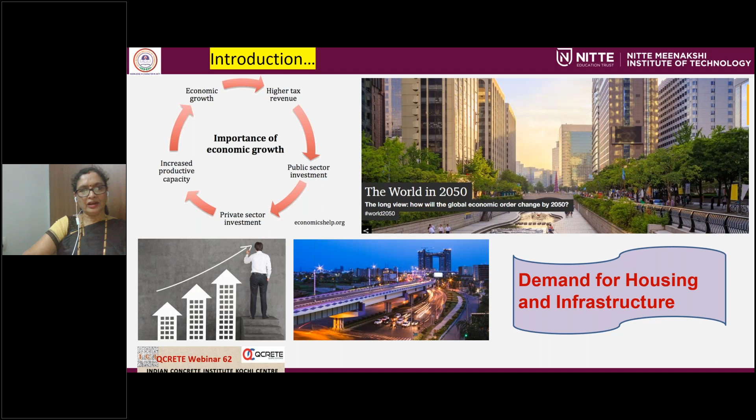Typical examples I can quote here are, one from United Arab Emirates: the 11 billion Etihad rail project and 2.7 billion Sheikh Zayed double-deck road project, which is going to start this year and completed by 2026. Then in India, 100 critical transport infrastructure projects with investment of rupees 75,000 crores, and a capital investment of 10 lakh crores. And if you take Australia, the gas industry road upgrades in Northern Territory, Australia, will be upgrading roads for supporting the development of gas resources around Beetaloo sub-basin.

So the Australian government has sanctioned $173.6 million for this particular project. These are all typical examples, and construction material market is at its highest, material consumption is at its peak, whether concrete or steel, and the projected growth in consumption is around 1,729.62 billion by 2030.

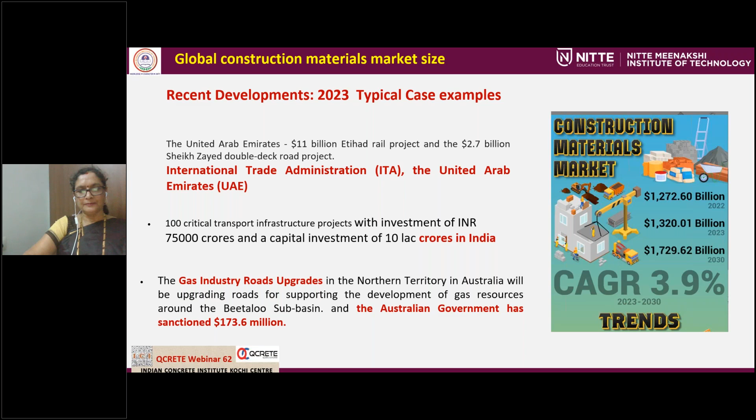Because of the huge demand for housing and infrastructure, construction industry is one of the largest consumers of materials and natural resources, and is a major contributor to the growth of any nation. It is also responsible for maintaining the harmony of nature, which is the basis for sustainability.

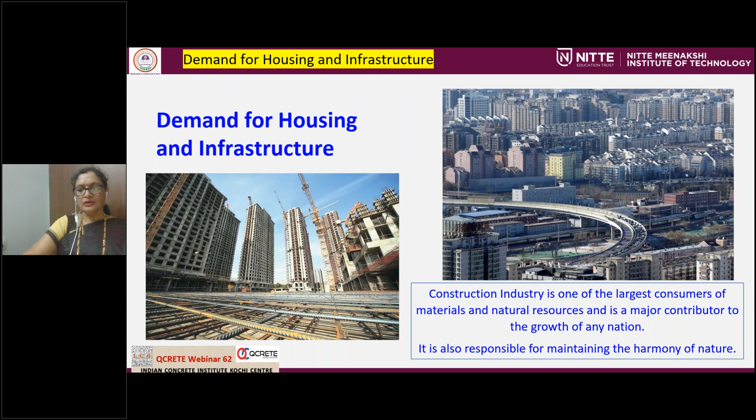If we look at the consumption of material, the construction sector is the second largest sector with regard to material consumption, accounting for around 20% of the material demand. Further, construction is also the fastest growing sector with regard to increases in absolute material consumption. Material consumption grew by more than 1 billion tons during 2007 itself. If such growth rates continue, the construction sector will surpass the agriculture sector and become the sector with highest material consumption.

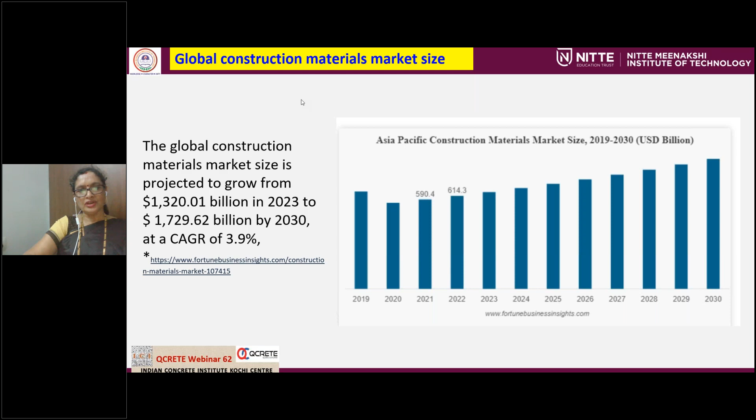So for global construction material market size, I took an example of Asia Pacific construction material market size. In this survey, the global construction market size is projected to grow from $1,320 billion in 2023 to $1,729.62 billion in 2030, at a CAGR of 3.9%.

So growing food, building structures, or moving goods from place to place are all energy intensive industries. Energy makes up a significant part of operating cost for business in all these areas, and it is a basis for assessing sustainability also.

Making a comprehensive assessment of a country's resource requirement is a challenging task. There's a method named material flow accounting, which was developed to assess the overall scale of resource extraction and use. The terms industrial metabolism or societal metabolism have been used to illustrate material flows and the scale of impact on the environment, indicated by the size of metabolic throughput—that means the amount of material appropriated from the environment and returned back to it in the altered form.

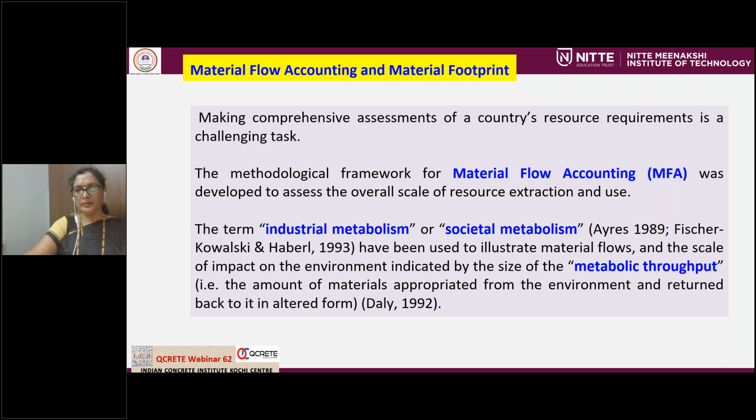This is the most important sentence: metabolic throughput is the amount of material appropriated from the environment and returned back to it in the altered form.

So while assessing material flow accounting, few materials are selected under each area or industry. In the construction industry, the critical materials identified in material flow accounting and their criticality was assessed on the basis of several attributes: scarcity of the resource, both physical and economic; cost of material and transit and carriage, that is transportation cost; environmental impact due to extraction and production; embodied energy, that is energy consumed from the moment of extraction through production and transportation; supply risk, which includes potential political, physical, cultural, legal factors; and finally, reuse and recyclability potential of the material for secondary uses. Based on these 6 criteria, materials are selected and assessed.

Now for the civil engineering or construction industry, the five materials identified are sand, soil, stone, limestone, and iron and steel.

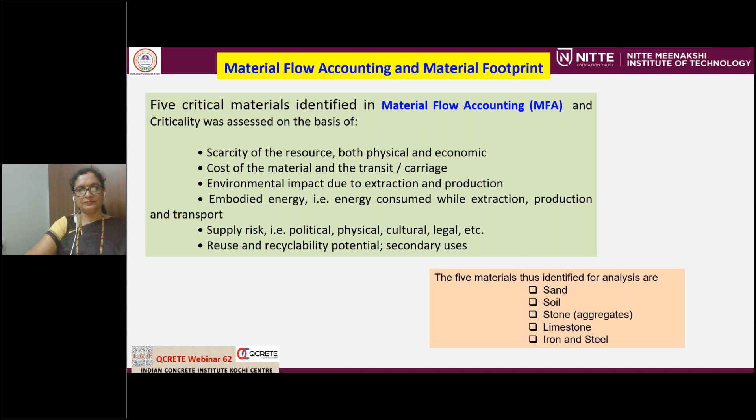So we depend on the earth. We are fully dependent on the earth, trying to extract material and also to exploit natural resources. So what is exploitation? Exploitation of natural resources is dependency on the natural and finite resources for economic growth of any nation without balancing the resources and waste.

So earth is one of the 5 elements of nature, from where we draw materials or resources for everything in construction. Earth is one of the 5 elements of nature called Panchabhuta in Sanskrit: Jal or water, Akash or ether, Agni or fire, Bhumi or earth, and Vayu or air. These are the 5 main elements of nature. We forget that we extract resources from it.

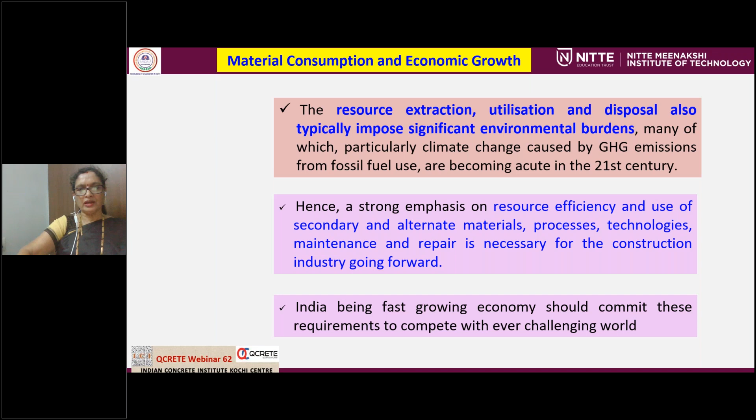India, being a fast growing economy, should commit to these requirements to compete with the ever changing challenges of the world.

So therefore, we need to manage growth and development without compromising the requirement of sustainability. That is, the judicious use of resources is essential in every society's interest through a combination of conservation and efficiency measures for economic, social, and environmental sustainability.

So the buzzword worldwide is sustainability and sustainable practices. The construction industry should become more responsible in its practices of creating structures using processes that are environmentally responsible, resource efficient, throughout a building's life cycle, from siting to design, selection of materials, construction, operation, maintenance, renovation, and deconstruction. Hence, to make a green infrastructure, the practices expand and complement the classical building design concepts of economy, utility, durability, comfort, and is known as sustainable high performance infrastructure.

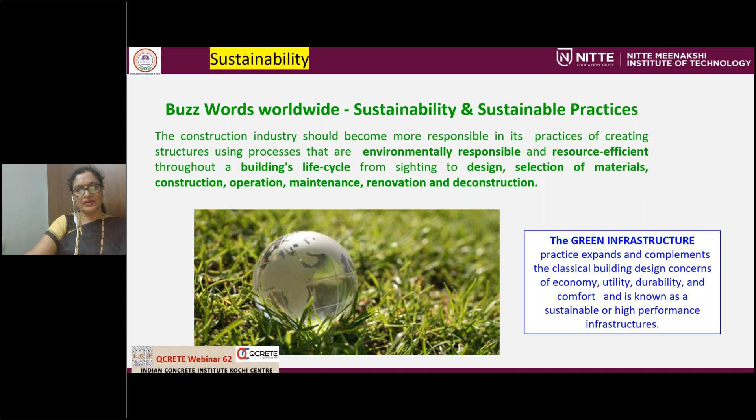Sustainability is not new for Indians. Sustainability has always been a core component of Indian culture. Its philosophy and values have underscored a sustainable way of life.

In ancient India, environment was given importance. It is interesting to see ancient Vedas with several references regarding ecological balance and environmental protection. All four major Vedas - Rig Veda, Yajurveda, Samaveda, and Atharva Veda - recognize the importance of maintaining season cycles. They also highlight how this getting altered results in climate change owing to inappropriate human actions.

India is a diverse country with a variety of ethnicities and religions. For most Indians, faith is an essential trait. The Indians are great supporters and promoters of environmentalism. Indians regard everything about them as pervaded by divine presence. Be it rivers, mountains, lakes, animals, flora and fauna, are all manifestations of God.

So they worship the Panchabhutas, the five gods of nature. Thus, there's a deep respect and gratitude felt towards nature.

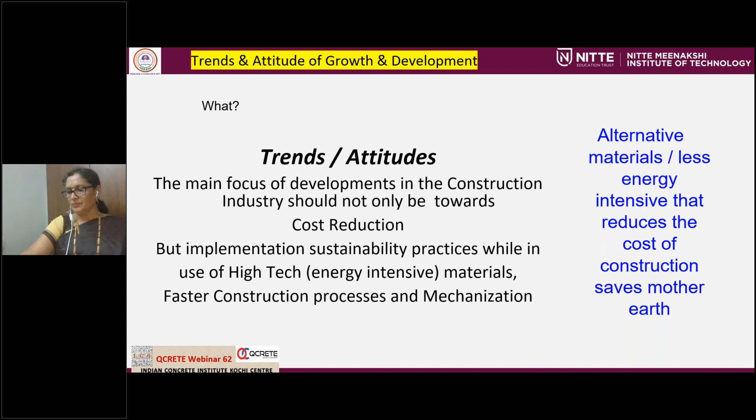So sustainability can be considered under four different aspects: built environment, consumption of material, environmental aspects, and ultimate effects. The built environment covers all aspects of our lives, encompassing the buildings we live in, the distribution system that provides us water and electricity, the roads and bridges and transport system which helps us connecting from place to place, commuting facility.

So through this, the built environment - while considering it from the stage of conception to completion - at every stage, sustainability should be looked into, whether it is surveying, design, construction, operation, maintenance, renovation or deconstruction. At all stages, one has to look at the energy of each material and process.

So use of less energy intensive materials, processes, technology and maintenance is one of the key factors for adopting sustainability. Use of alternative materials in construction also.

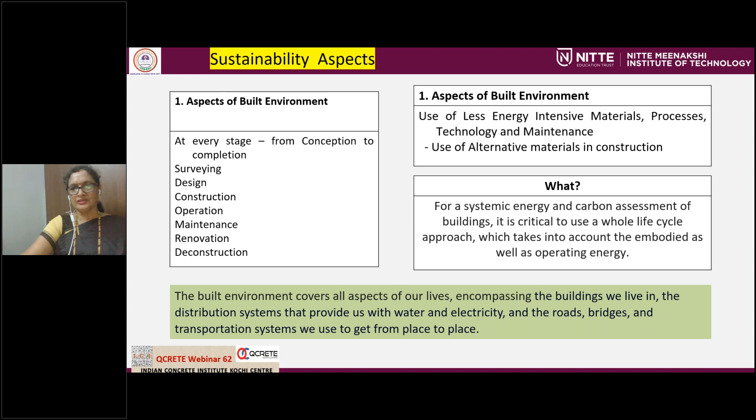So then what is embodied energy? Embodied energy is the energy required from the moment of extraction of material, through the process, and then finally producing a product and transporting it. So in construction, that means the sum total of all energy incorporated or invested throughout various stages of manufacture from raw materials to finished product.

Now in construction, there are various stages at which energy is involved. Initially, embodied energy - energy consumed in creating the structure, which indirectly says it is from conception to completion. Then from a material perspective, from extraction, processing, manufacture, transportation and assembly.

The second one is recurring embodied energy, that is the energy required for day-to-day maintenance. Then operational energy, which may be active or passive. Passive energy system is energy drawn from natural resources, renewable energy. Active energy system is energy from HVAC, mechanical, electrical, chemical processes and other requirements.

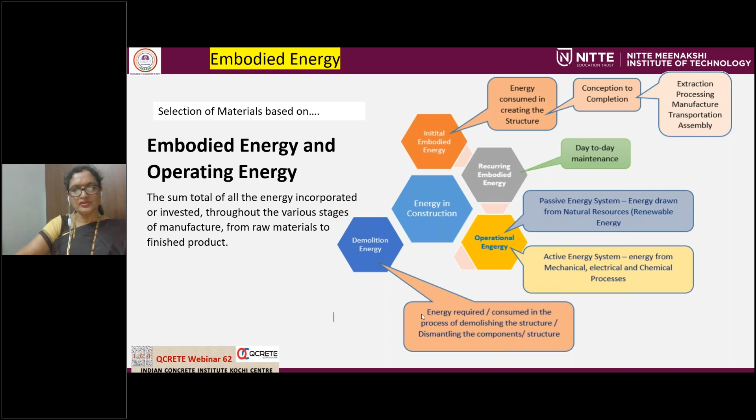So each material has an embodied energy, measured in terms of megajoules per kg. There are a few materials I have listed here as a sample.

While selecting the materials, there are many points to be considered. One of the points is embodied energy. Sometimes we may select a material which has low embodied energy, however, if it needs high operational and maintenance energy, then it may not be worth selecting that material.

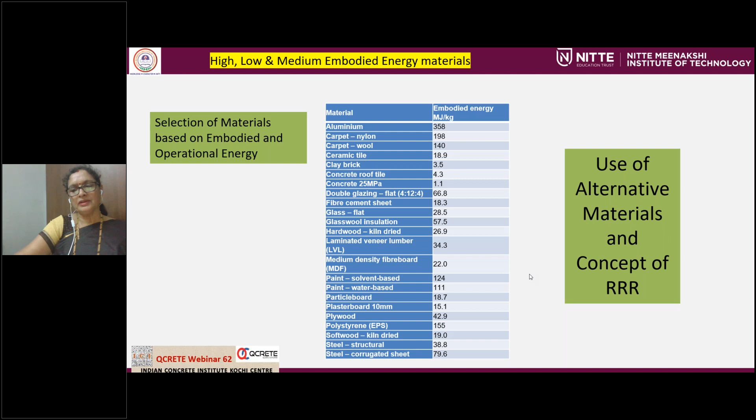So if you look here, structural steel is 38.8 megajoules per kg, corrugated steel 79.6. Of course, this energy assessment depends on place to place - small variations will be there with reference to that.

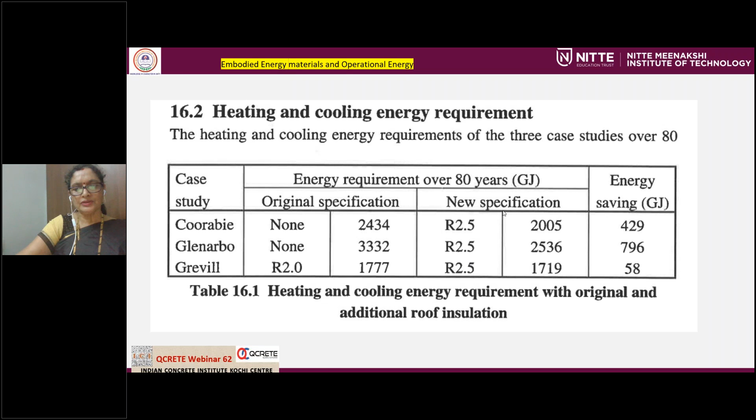So if we look at the embodied energy with reference to operating energy, we can see there is almost 2.5 times increase in the operational energy. This embodied energy of building materials was studied by Stephen Pullen. He considered 10 houses in Australia and studied embodied energy as well as operation energy. The relationship between embodied energy and heating cooling energy requirement was estimated from these typical 10 case studies. You can see the different structures from different locations he considered.

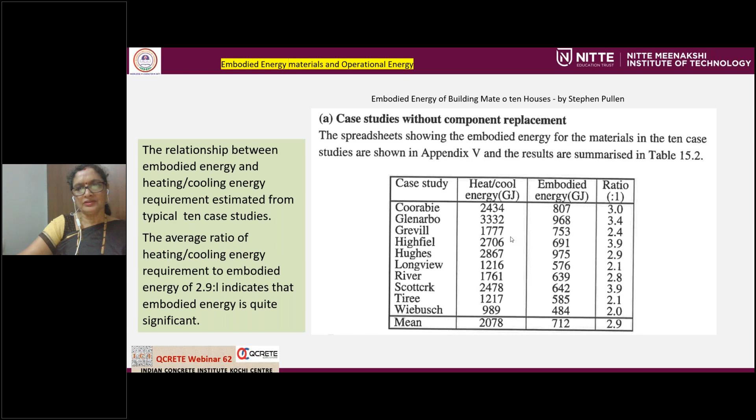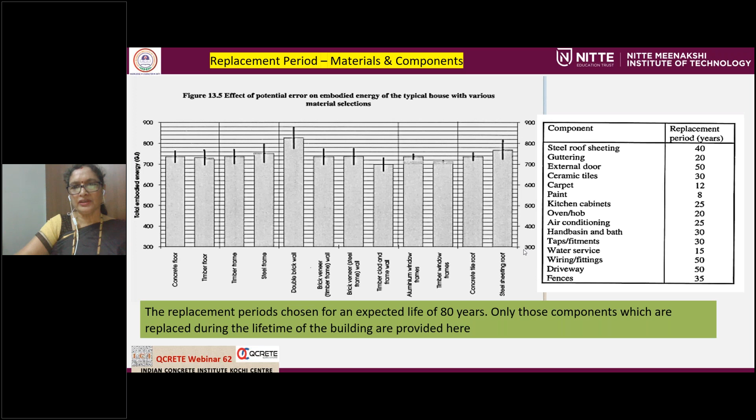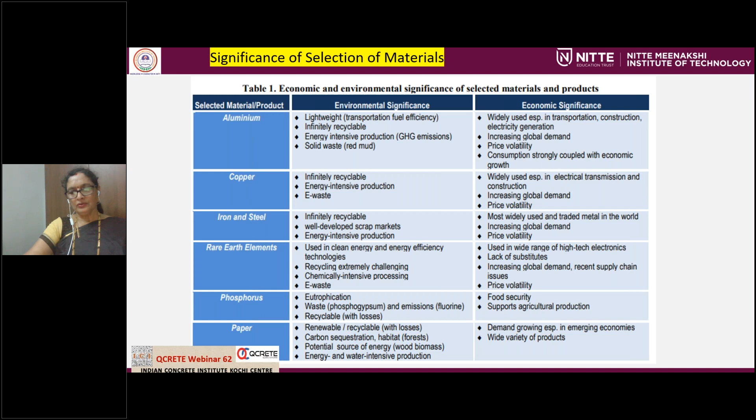So I have quoted a few: copper, iron and steel, rare earth elements, phosphorus and paper. For all these materials, one of the points is reuse and recycling - waste management. Waste management is a known factor for all of us about sustainability. However, we are trying to incorporate waste as a resource, not just in concrete, but in other materials also. In addition to waste as a resource, there are other opportunities created through the use of waste materials - that is the concept of reduce, reuse, and recycle.

The Recycling Economic Information, REI, reported by the Environmental Protection Agency, EPA US, includes updated information about the number of jobs created from recycling, the wages created, and tax revenue to the government. The report shows that recycling and reuse of materials creates jobs while also generating local and state tax revenues. One example cited - this is old data but still worth knowing - is that in the United States it accounted for 681,000 jobs.

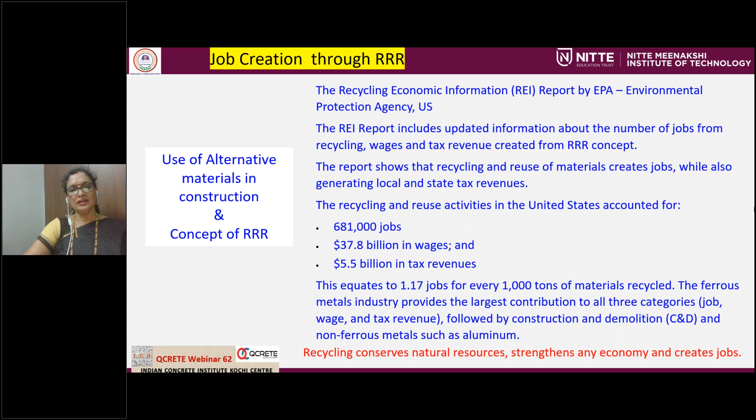This equates to nearly 1.17 jobs for every 1,000 tons of material recycled. In addition to reducing the burden of waste disposal, it also creates jobs, wages, and tax revenue for the government. In this waste material recycling, the ferrous metal industry provides the largest contribution to all three categories - jobs, wages, and tax revenue - followed by C&D waste, and thirdly non-ferrous metals such as aluminum.

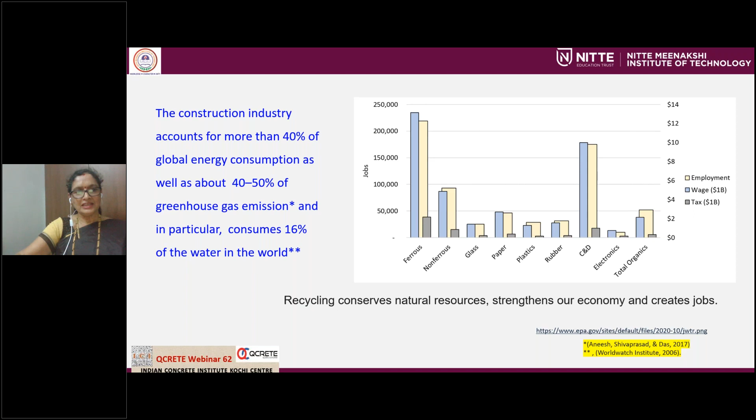So recycling conserves natural resources, strengthens our economy, and creates jobs, right? The construction industry accounts for more than 40% of global energy consumption, as well as about 40 to 50% of greenhouse gas emissions, and in particular it consumes 16% of water in the world - consumption of resources in terms of energy, water, material, and natural resources.

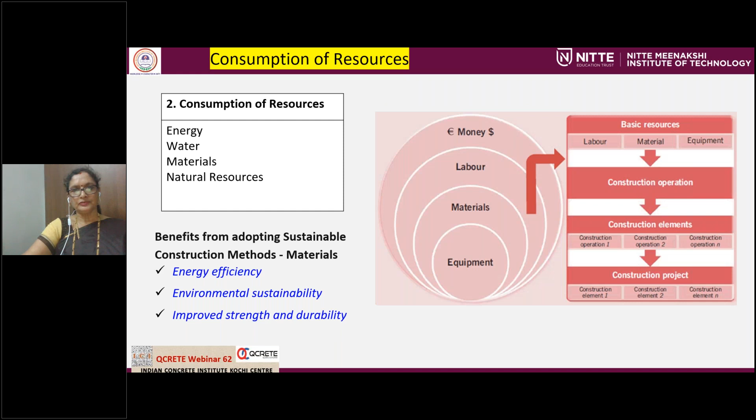The benefit from adopting sustainable construction methods and materials: it improves energy efficiency, contributes to environmental sustainability, and improves strength and durability. In addition, there are known benefits for health and environment - improved health due to safer materials, increased productivity, better surroundings, and more effective noise protection are a few advantages. Green buildings can improve the quality of life. Overall, the green building concept will improve the quality of life.

One can significantly reduce the carbon footprint by using renewable materials, reducing waste, and minimizing energy usage during construction. There are emotional benefits also - improvement in pride and improved living and workspace.

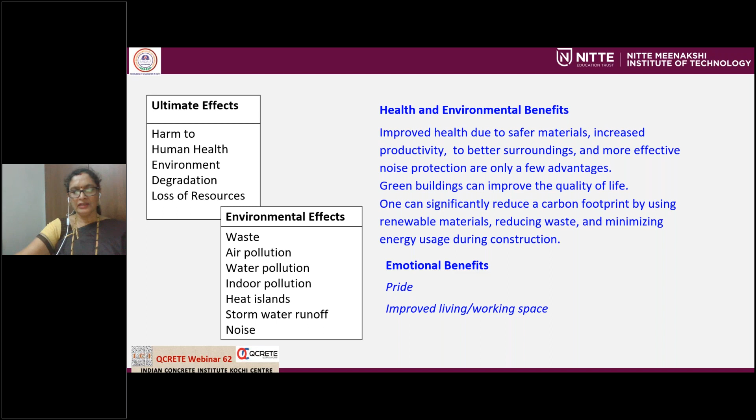Yeah, the latest trend or concept that is moving around in the industry is about carbon dioxide emission. Carbon dioxide emission focus is on reducing carbon dioxide emission in all the projects. It ensures carbon...

Carbon is consistently and transparently quantified at all key points for a project. It is to achieve lower carbon solutions. Users are required to develop their expertise with carbon management, during construction and during maintenance also. Then net zero targets for every project, net zero carbon transition, reduce whole life carbon emission as well as whole life capital and operational cost.

And an increased emphasis on whole life carbon in line with 1.5 degree global warming and circular economy principles. A report in 2021 from Oxfam found that by 2030, the global average emission needs to sit at just 2.3 tons of carbon dioxide per year to keep global warming below 1.5 degree centigrade.

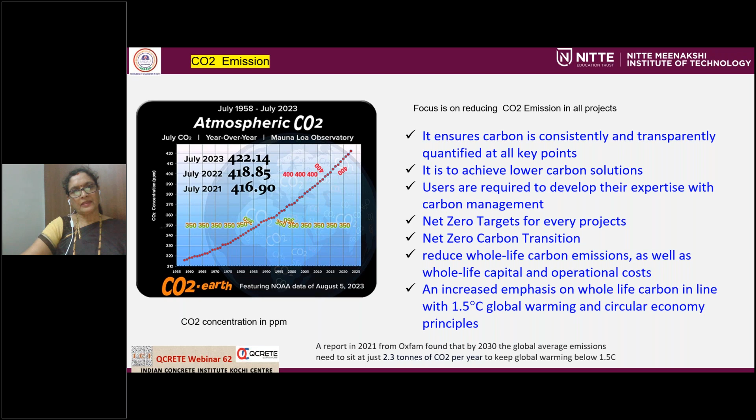So there is one more index called Greendex Index. This Greendex Index is compiled annually by National Geographic and Globescan. It measures the way consumer patterns are responding to environmental concern. The collected information is then gathered into a comprehensive ranking system.

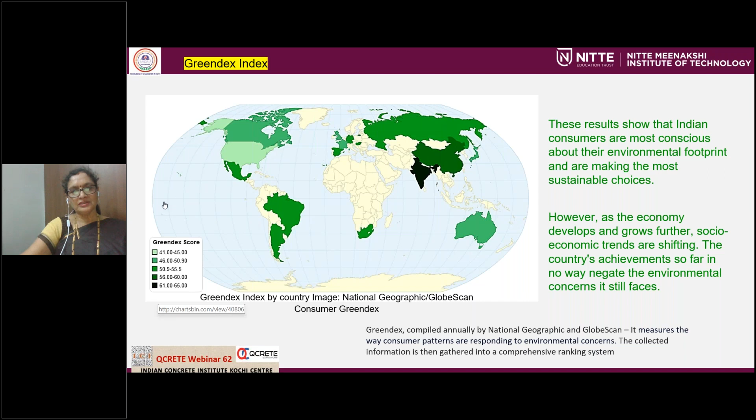If you look at the map here, India comes under 61 to 65% Greendex score. That indicates these results show that Indian consumers are most conscious about their environmental footprint and are making the most sustainable choices. I don't know what factors are assessed because of the actual trend and the point mentioned here. However, as the economy develops and grows further, socio-economic trends are shifting.

The country's achievement so far in no way negates the environmental concerns it still faces. So sustainable construction practices aim at net zero buildings and infrastructure, energy conservation codes of practice, some comprehensive plans to achieve sustainability that call for transit-oriented development, compact development patterns, and environmental stewardship strategies to reduce environmental impacts at various stages of construction, material selection, technology, practices, operation and maintenance. It also insists on minimizing sprawl and conservation of natural resources.

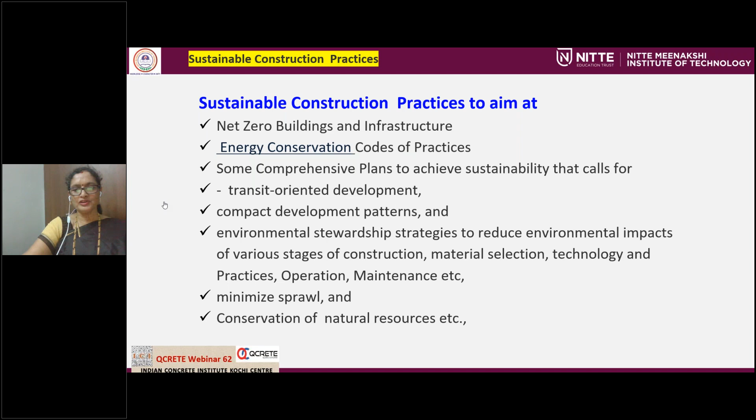There are many codes for practicing sustainability, for adopting sustainability across the world. I have listed a few here: Carbon Management in Building and Infrastructure, PAS 2080-2023, which is practical actions and examples; Institution of Civil Engineers, Construction Leadership Council code; retrofitting dwellings for improved energy efficiency specifications and guidelines; environmental management system requirements with guidance for use, BSEN ISO 14001:2015, and other codes I have listed here.

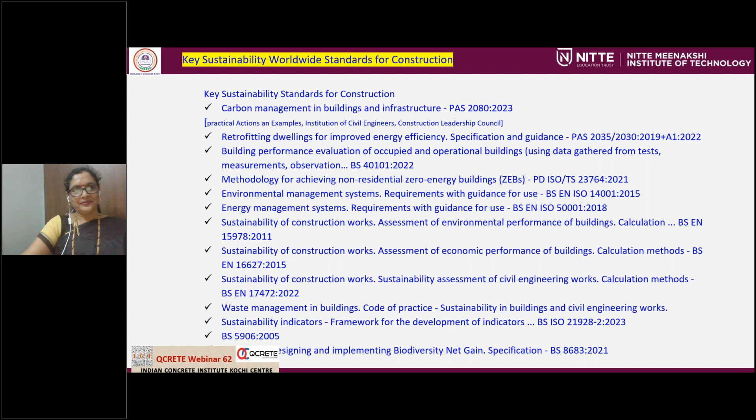Now, while in my presentation, the regular mention of sustainability in terms of alternate materials, then use of reuse, recycle - the 3R concept: reduce, reuse and recycle, waste management - those points I have avoided because all the participants are very familiar with those concepts.

So how do we assess sustainability? What are the policies and regulations? The zoning codes to design buildings with green materials or energy efficient features are available. They are building codes from US Green Building Council, Leadership in Energy and Environmental Design, that is LEED rating system, then USGBC LEED rating system, and International Energy Conservation Code IECC, International Green Construction Code IGCC, then Indian Green Building Council IGBC, GRIHA - Green Rating for Integrated Habitat Assessment, and National Building Code 2016.

In LEED there are different levels of certification for green buildings, which I think almost all of us are aware of, based on different criteria, and total credits and points are earned. The various criteria considered are sustainable sites - this includes design aspects, construction aspects, operation, maintenance, renovation, and deconstruction aspects, in addition to durability, then water efficiency, energy efficiency, atmosphere, material and resources, indoor environmental quality, and innovation and design processes.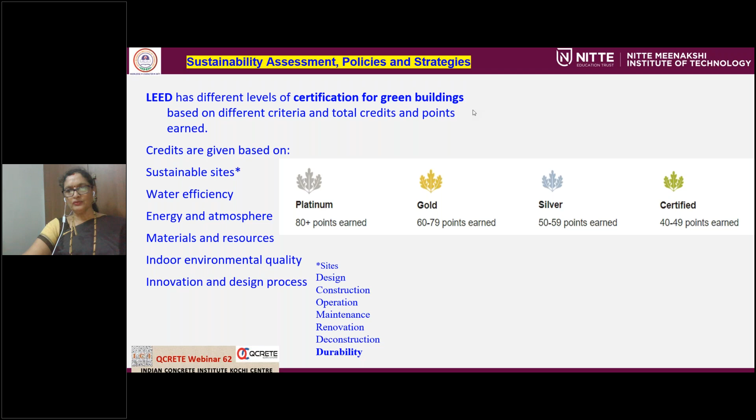So based on the material score, the LEED certification may be platinum, gold, silver, and certified. 80 and above is platinum, 60 to 79 gold, 50 to 59 silver, and 40 to 49 points earned is just certified, LEED certified building.

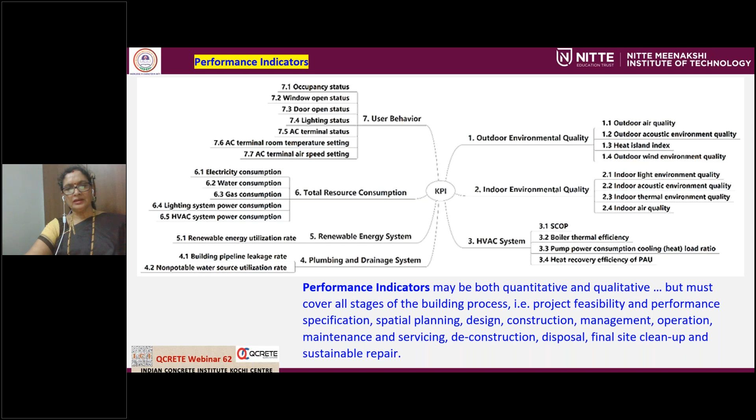So, worldwide sustainability promotion. The sustainable development goals are a universal call to action to end poverty, protect the planet, and improve the lives and prospects of everyone everywhere. There are 17 goals which are very common, known to all of us.

The following principles are required to be adopted across business practices and in advocacy with stakeholders, as well as media, commercial partners and sponsors: sustainability policies and practices, implementing and advocating for SDGs, a human rights-based approach including addressing issues of discrimination and avoiding discriminatory practices, equality and equity including gender, and climate action.

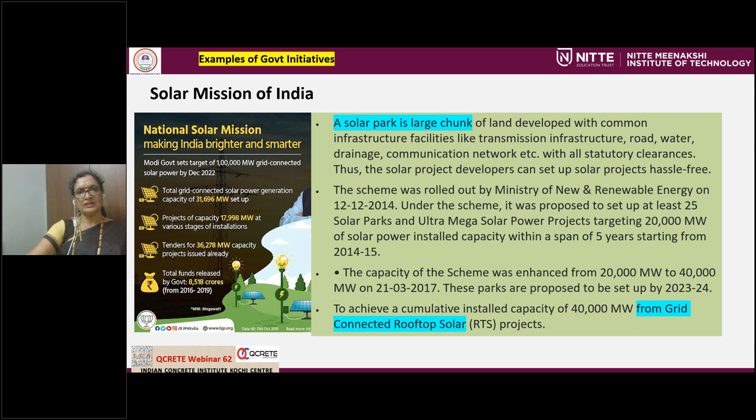So what is the need of the hour? Commitment for implementation of sustainability. We talk so much about sustainability. However, it is mainly now we have to focus on implementation at every stage.

During 1991, when a new economic policy was introduced, these policies liberalized the market and introduced India to the globalized world. There is no doubt that 1991 reforms lifted many millions out of poverty thanks to the rapid growth. However, the general trend of economic profits meant environmental degradation. That is the cause of concern.

However, when the reforms were not purely driven by economic consideration without ignoring environmental criteria, earth is saved and sustainability becomes part of economic growth. That is what is need of the hour.

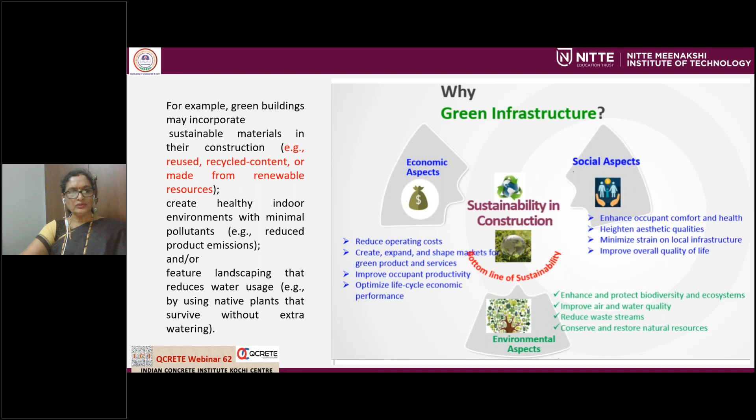So green buildings may incorporate sustainable materials, create healthy indoor environments with minimum pollutants, and feature landscaping that reduces water usage. So to conclude,

Confronted with population growth, rapid urbanization, and rising income, there is increasing demand from consumers and industry trends. The resource extraction, use, and improper disposal methods are leading to land degradation, biodiversity loss, air and water pollution, as well as greenhouse gas emissions, contributing to climate change that are expected to worsen in future if corrective actions are not taken.

These will severely hinder particularly India's efforts to promote balanced and inclusive growth, to improve living standards, improve infrastructure, and create macroeconomic stability. Hence,

implementation of a far-sighted and comprehensive resource policy is essential for India going forward in order to meet social, economical, and environmental sustainability goals. So this presentation is one of the various initiatives and confidence building efforts towards creating awareness towards conservation of natural resources and protection of environment.

Now it's time to act. Hence, I would say that effective utilization of resources, keeping in mind optimization of energy, minimization of pollution, adoption of lean management, and conservation of natural resources should be the key focus areas of any construction.